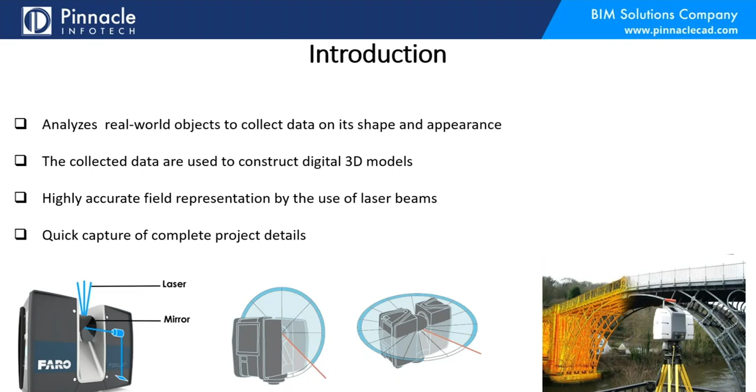As I said before, the important benefit of using laser is to improve quality and accuracy. It takes planning and detailing to a different level on site. We can get immediate feedback, and real-time scans can be done and accessed immediately to improve operations. The scanning process can be done in minutes, whereas conventional methods could take hours to do the same survey.

I would leave the panelists to give more details on this and how they are reducing and eliminating rework. We are reducing the physical effort and streamlining coordination on site. So today our focus will be on construction management and how the laser can be used. Now I will pass on to Leo, who will take us through the great project that he is doing and the wonderful job his team is doing.

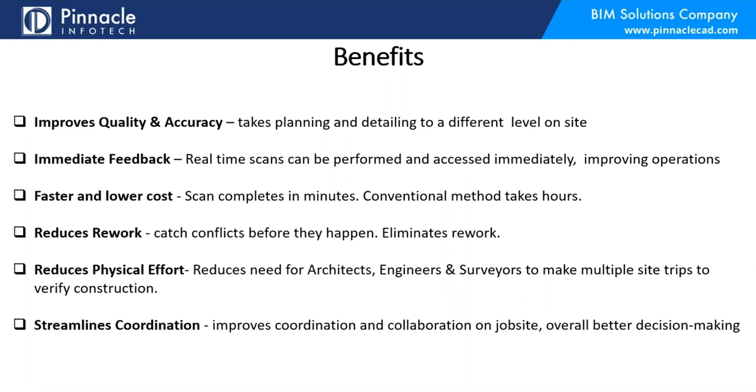If we go into project specifics, our project incorporates in its design a variety of technological innovations with unique features, such as the enormous gross capacity of 92,000 seats. The bowl is an air-conditioned seating arrangement that incorporates air diffusers and under-seat cooling nozzles to pump cool air into the stadium during the tournament phase.

The most unique feature, though, is the construction, erection and installation of the world's largest internal roof structures, which span over more than 350 meters.

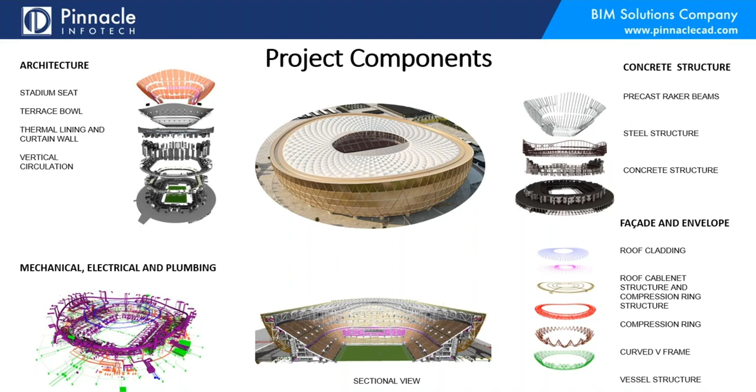The field of laser scanning implementation in our project is focused on as-built data collection, measurements, and digital project controls. We exercise a lot of tasks in terms of earthwork management. We're making advanced implementation deflection and deviation analysis, and we also support construction staged impact analysis.

We work digitally to support inspections, and generally speaking, we have close integration with the construction teams by supporting them with virtual erection and simulation studies.

The consistent collection of as-built data in point clouds allows for a more efficient management of site activities in a way that was not possible before. It drastically eliminates risks and uncertainties, allowing for more prefabrication on site. It also reduces human errors and error-prone observations, giving the opportunity to the end user to process and evaluate an enormous amount of data.

The consistent collection of point clouds allows comparison between two principal stages, the design and as-built models, which can be extracted into drawings. We can obtain archival records of our project at any time interval, and generally speaking, we document critical milestones.

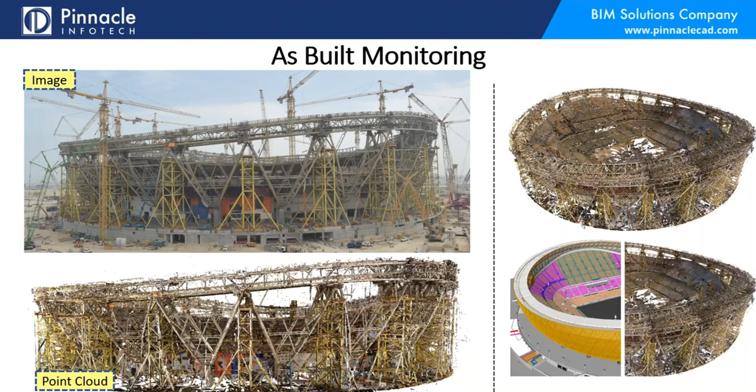Specifically in our project, the use of laser scanning is extremely beneficial and is highly recommended for monitoring and control purposes, which are primarily related to construction performance requirements. This may be applicable for large piers, buttresses, long span beams, and overall complex building components.

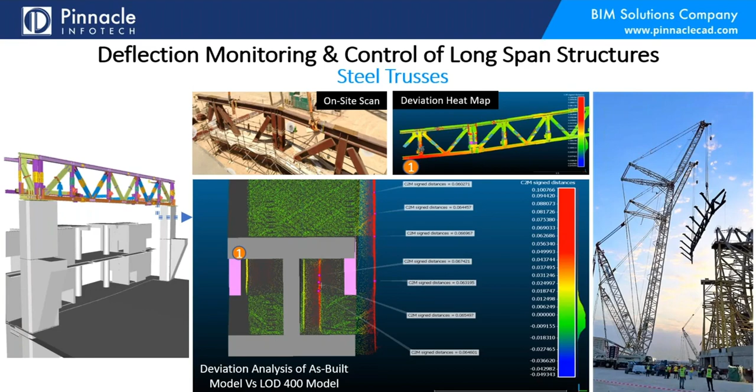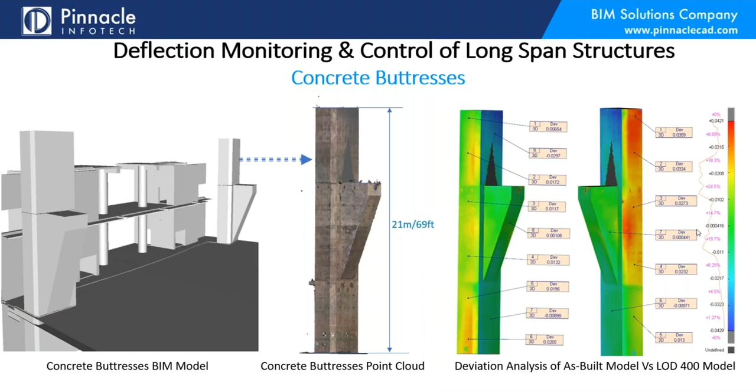The main function is based on the overlay of BIM models that are developed to extract shop drawings. Those models are called construction models, or LOD 400 models, which are overlaid against point clouds. That overlay can be used for multiple purposes, to support multiple scenarios and reports, which we can see in the slides below.

If we start studying cases one by one, some exercises we have already undertaken, in the following slide you can clearly see how the findings of a laser scan analysis were extremely useful for main contractors. You can clearly see an assembly of steel elements that was conducted for the sake of evaluating the erection of a truss beam along with its superstructure.

This was done in terms of construction tolerance and deviation analysis. You can clearly see how the point cloud itself represents all deviations in a heat map, which is used for construction verification purposes.

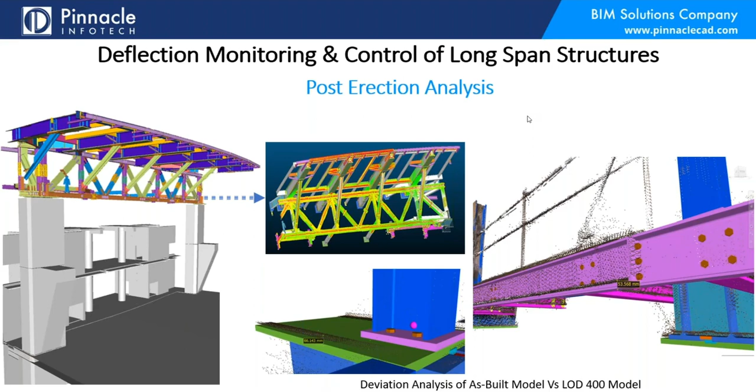Our project considers a modern requirement of sports architecture, which is very strict in maintaining unobstructed views, having very efficient utilization, making clear sight lines for the spectators, and providing ample spaces that usually pushes the design to its limits.

The below extract from BIM clearly shows how a truss beam and a set of cantilever beams support the superstructure of the stadium, which is equivalent to a 5-story steel building, and which also carries the seating bowl.

Leo, we cannot hear you. Can you check that? Leo?

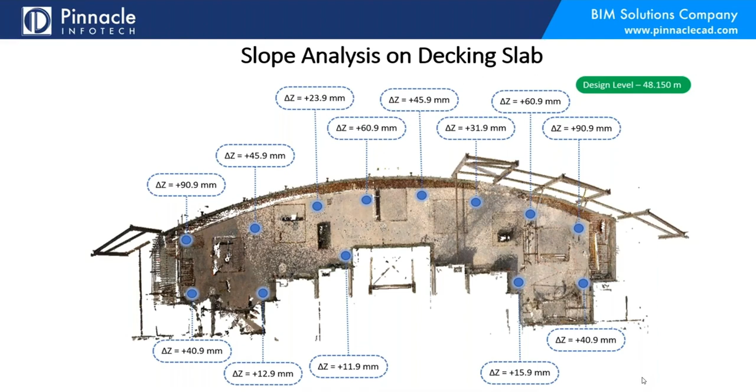Since we are dealing with a special structure that has pushed the design limits of the structure itself too much, the accurate monitoring of as-built conditions was achieved by using laser scanning and evaluated in a BIM-based environment. The current approach enabled the general contractor to have a better understanding of the structure's performance and evaluate thoroughly the risks associated with dependent construction activities.

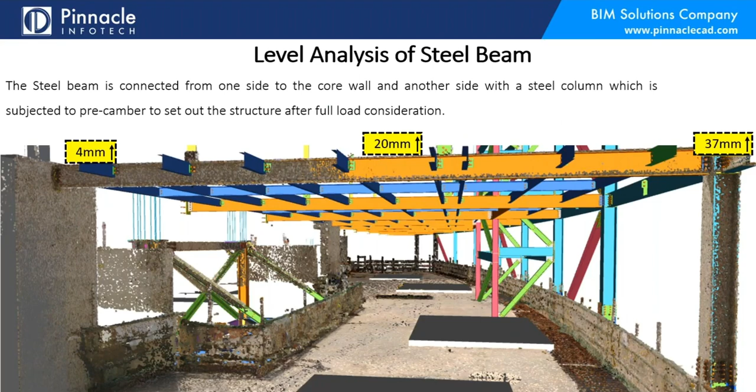In our project, laser scanning is also used as a supplementary material for digital inspection purposes. Although we have allowed for systems like BIM 360 for digital inspection requests, we also support those inspections through the efforts and tasks undertaken by the point cloud itself and through laser scanning.

We can clearly see in this slide how a LOD 400 model of one anchor plate is overlaid against the BIM model, and we created a deviation analysis report, being able to hand over the part of the work from the reinforced concrete subcontractor to steel. Next, please.

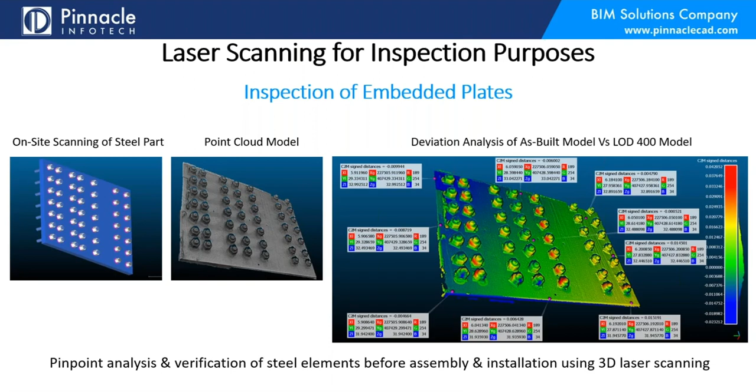Now, of course, laser scanning can be used in simpler tasks that may be of equal importance, related to floor levelness and flatness. In projects like ours, consisting of multiple building units forming a complex, maintaining consistent floor leveling is of paramount importance. The floor levels usually accommodate steel embeds and steel columns, so you have to ensure there is consistent leveling to receive those embeds along with the application of screed and flooring material.

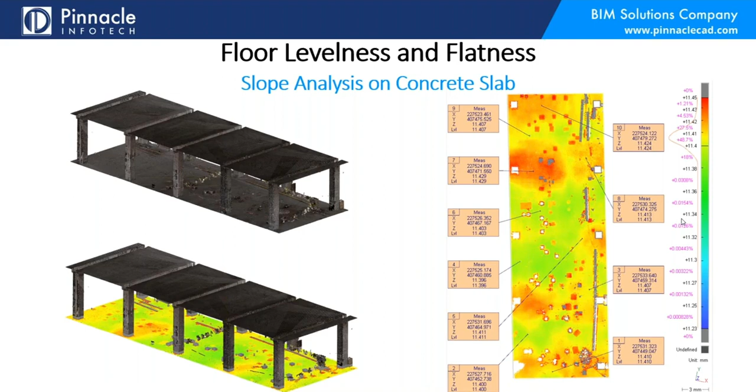Next slide, please. Thank you. Of course, as part of the broader implementation in our project, we use laser scanning on all building components, including the facade.

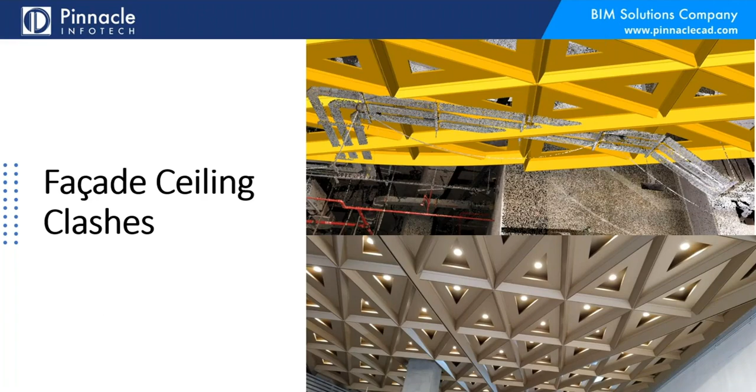In projects like the Lusail Stadium project, which is under a design and build type of contract, the works may be executed concurrently - meaning that although construction or MEP works may proceed on site, some elements may still be under design. We had the opportunity not only to overlay construction models against design models, but also to boost this activity by collecting point cloud data and directly comparing it with elements under design at that stage. This gave us a streamlined process on site with elements in different stages - some released for construction, others still under design.

The facade is a critical component for the aesthetics of the project, which interfaces with the primary steel elements through the brackets. In our project, we had approximately 4,000 brackets, each individually coordinated against other interfaced elements like MEP or other structural works before issuing the brackets for fabrication. This saved a lot of abortive work and delays by having all elements fabricated and installed at one go.

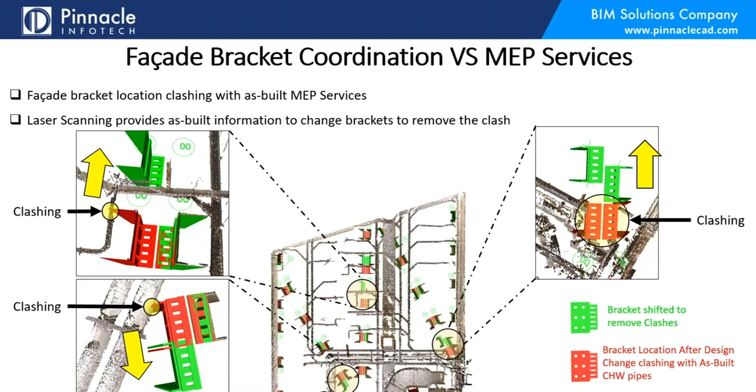Digital handover was also of paramount importance and extremely useful for the bracket and facade installation. Since the point cloud can capture millions of points within a very short period of time, laser scanning was used to hand over the primary steel package from the steel subcontractor to the facade subcontractor, with full monitoring of deviations and evaluation that the handed-over work lays within the acceptable range of tolerances.

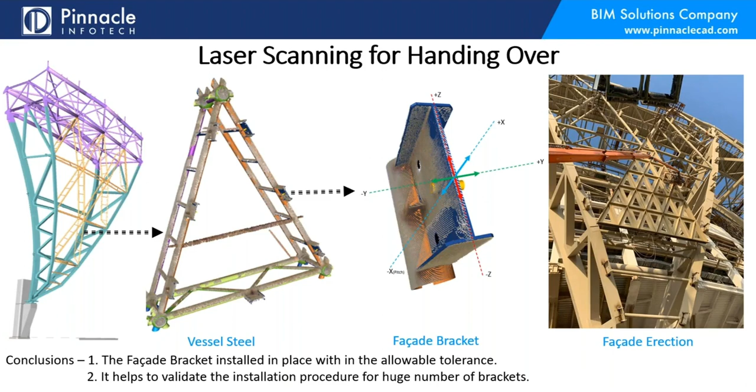Of course, MEP cannot be excluded from the laser scanning strategy, and it is primarily related to verifying the MEP works on site. Complex and heavy-duty MEP arrangements have been scanned and compared against our construction models at different stages. Especially for heavy-duty MEP rooms, laser scanning was used to verify that all assemblies are going as planned, without any actions that may cause delays or fail to conform to the tolerances.

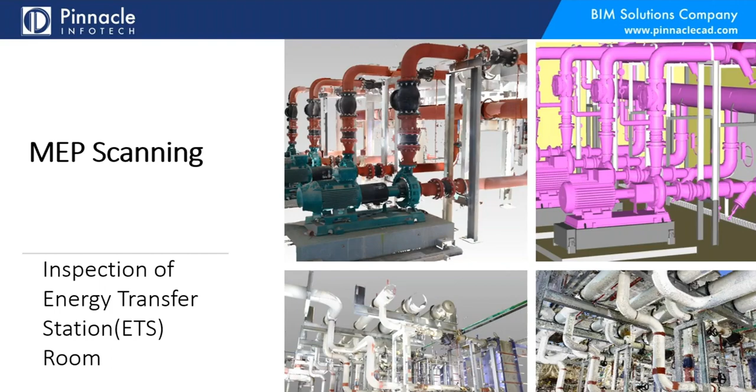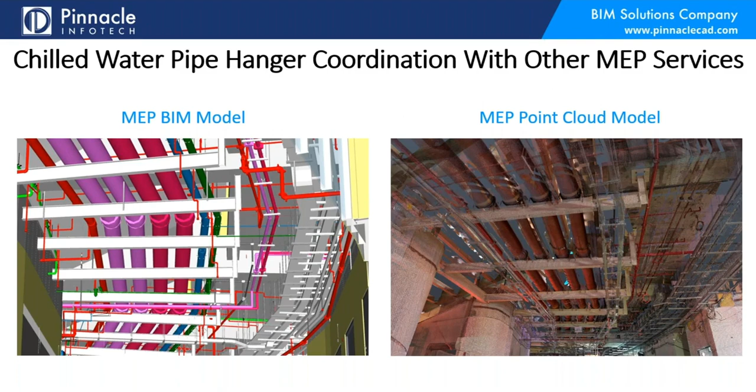The next slide clearly shows an example of good execution on site. As you can see, the construction model used for extracting shop drawings released for construction on site is met at a very good percentage. The point cloud in this case verifies that all inputs put into the construction model are implemented on site without deviation.

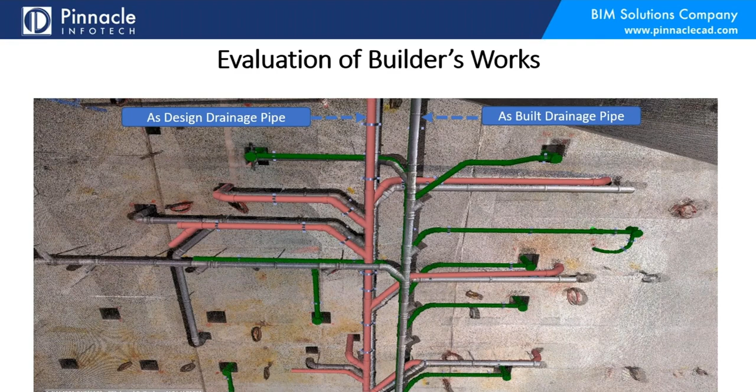Another extremely useful application is builder's works validation. Usually the builder's works are executed prior to commencement of MEP works. This is a representative example of comparing the cutouts of one suspended floor against the drainage system. We had the opportunity not only to verify that our builder works are implemented, but also to implement changes through our change management workflow, using point clouds as the sole source of information for releasing drainage works on site for construction or implementing changes on the systems.

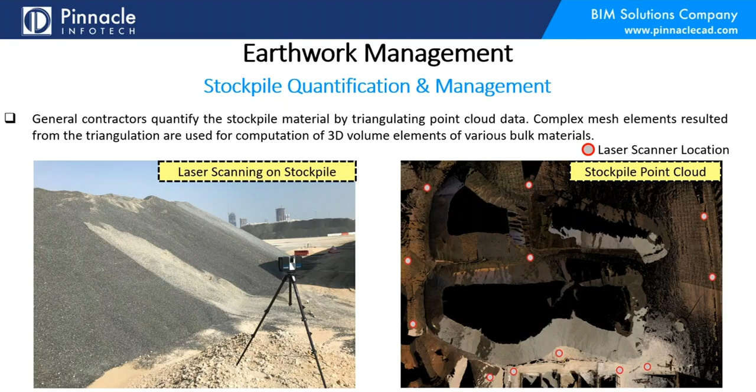Laser scanning was also used in different nature of works, such as earthwork management. In our project, we have a great stockpile area of filling material coming from the site itself, and we also supply aggregates to our batching plant. The close monitoring of aggregate quantity was of major importance since currently, due to COVID and other parameters, there is a shortage of materials on site in the market. Laser scanning provides us the opportunity to rationalize volume calculations by implementing a very accurate input, which enhanced our output, the volume calculation.

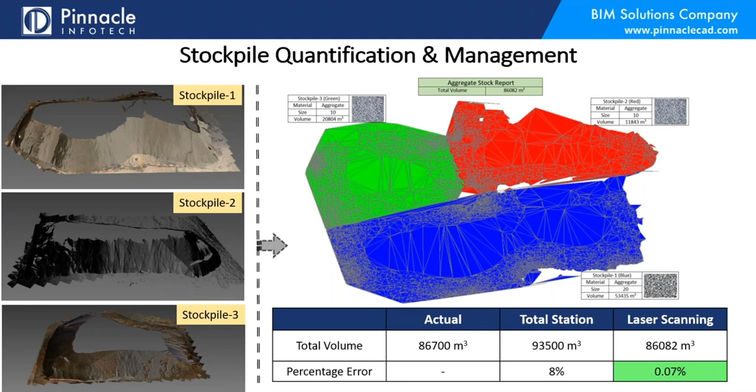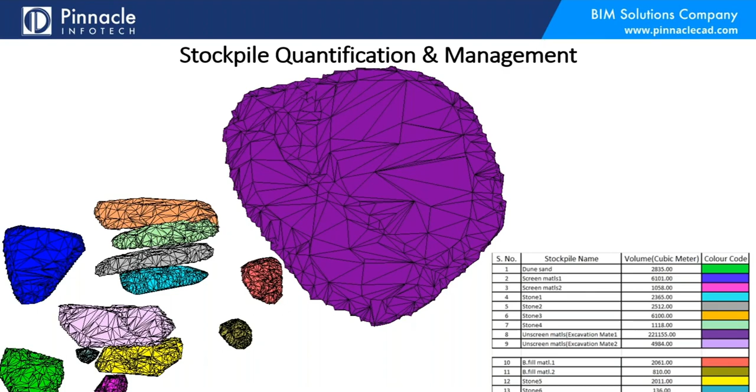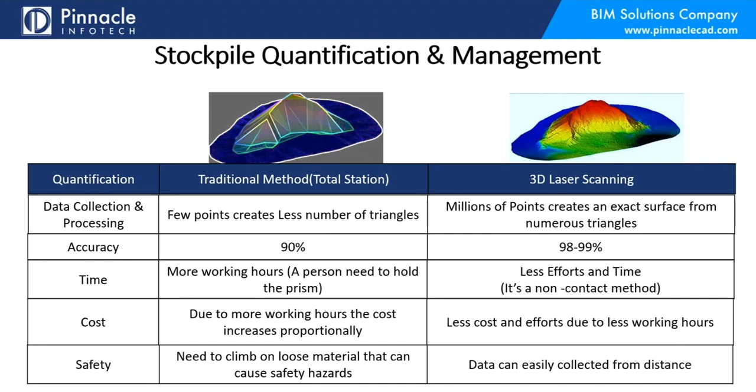In gross percentage, each stockpile evaluated by the traditional method against the laser scanning always shows approximately a variation in quantity of 10%. In other words, the laser scanning input can optimize the volume calculation by approximately 10% and give us more accurate results compared to the deposits we have in terms of stockpile and aggregate materials.

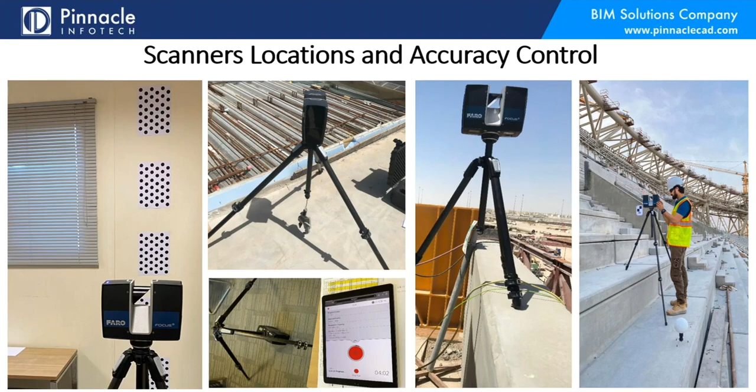Without any doubt, the instruments we use for making all these studies are our laser scanners. There is a special process for the laser scanners to always be calibrated and up to date. Fortunately, today's technology provides us with a lot of tools for self-calibration quite frequently, which ensures that whenever we want to achieve higher quality, higher accuracy measurements, self-calibration is always a tool that modern technology incorporates, extremely useful for our own performance.

Now the next part of our presentation is slightly different compared to the previous one. We will be presenting how laser scanning is implemented in an end-to-end solution to support a very specific requirement for the roof, primary steel and facade structures. The main requirement we had to respect in this workflow was the sensitivity of these structures to deformations, meaning we have to deal with highly deformable elements where, for each stage, the deformation should be controlled and federated within an agreed framework of tolerance.

The main aim was to establish a workflow that could ensure proper handover between different stages for different parties. For that purpose, Pinnacle created a composite BIM and laser scanning roadmap comprising 6 control stages. Those stages are considered the pillars of a successful project delivery for that part of the work.

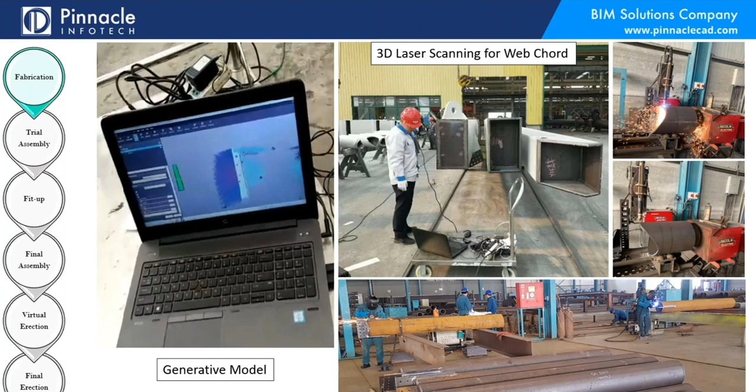Afterwards, the vast majority of steel elements, consisting of built-up sections, were categorized into certain assemblies that had to receive a trial assembly. This trial assembly was a requirement of the general contractor to the fabricator, to ensure that prior to shipping, the steel elements would be of the proper geometry, not in the form of parts, but in the form of full assembly.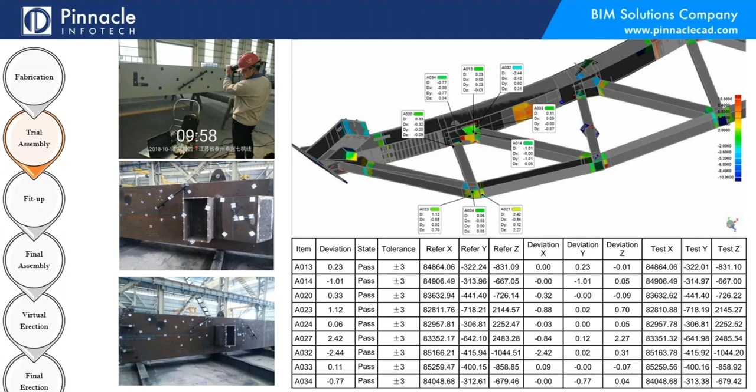So several trial assemblies took place. They have been scanned and evaluated in a deviation analysis report, so even the fabricator was aware, before shipping the order, of the range of tolerance being shipped to the site. This also assured the general contractor that it receives material with the cut length and shape as per the design requirements. Now, upon delivery of all these built-up sections, received by containers and shipped into the project location, the fit-up works commenced.

The fit-up works implemented a temporary arrangement of welding. It's worth noting that our package is primarily related to welding connections, so we apply temporary welding for all these steel assemblies, and we laser scan it for the sake of evaluating its accuracy.

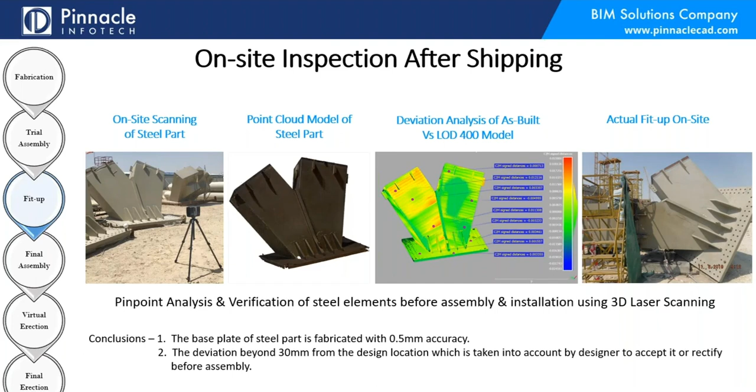Once the temporary fit-up works were confirmed to meet the proper alignment of the members, we proceeded with the full welding on site.

In your pictures, you can see a V-frame. It's worth noting that the size is extraordinary for those segments. We're talking about sizes that may exceed 164 feet in length, and each sectional profile may have a size of 6 feet by 4 feet.

The critical and key challenge we had to meet in this process was that during the full welding process, the internal stresses that the welding exerts into the section create excessive expansion and contraction into the members, which in certain cases creates a local distortion.

So the aim of the laser scanning at this stage was to evaluate the magnitude of the welding effect over the final assembly on ground, including the temperature effect from rising from daytime to the night cycle, which, considering the size of these elements, is also quite considerable.

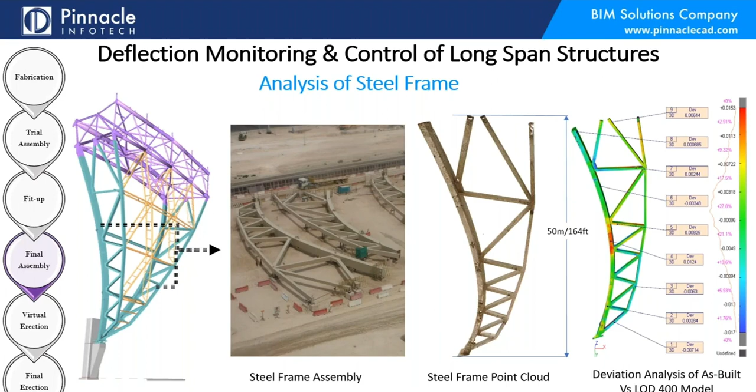Of course, the point cloud itself, upon the full welding process, becomes the most accurate and sole source of as-built information.

So virtual erection and simulation studies were performed based on the point cloud collected from the final welding process, and they were used for verification purposes in terms of lifting, interfacing with other as-built elements, and also deviation analysis against design models in order to evaluate the magnitude of change during this fabrication and fit-up process.

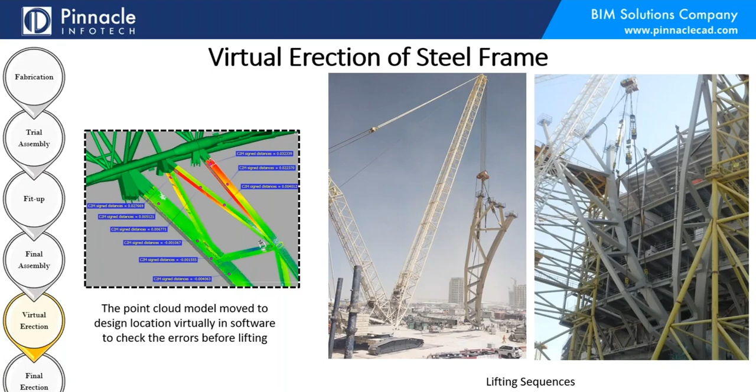The virtual simulations were performed for each component and stage of the primary steel package. However, the giant dimensions of the members, which in certain cases may exceed weights of approximately or more than 400 US tons and span over 110 feet, made this a very challenging exercise that the laser scanning performed exceptionally well.

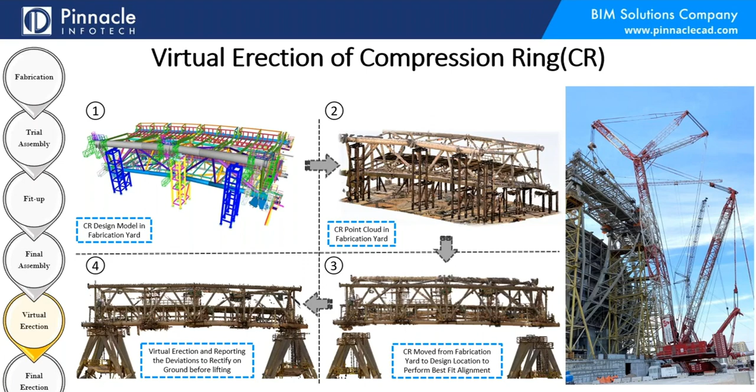The interfaces between adjoining members were collected and controlled based solely on laser scanning, and we achieved great accuracies. Specifically, the scans associated with these measurements didn't exceed the range of plus minus 1 millimeter, and we are extremely proud of getting so deep into this accuracy exercise and providing such trustworthy results to the project for undertaking this kind of complex work.

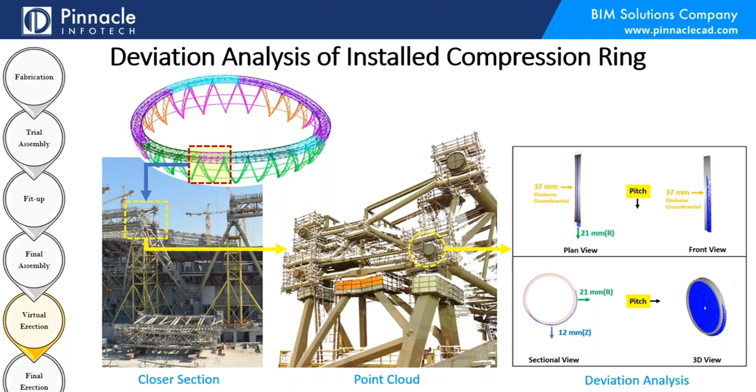Lifting simulation is also of paramount importance given such a size and self-weight of members.

So the lifting itself was virtually processed in BIM by using the point cloud geometry, and we created sequential steps that were part of the official lifting report that we submitted to the client for approval.

So even the lifting engineers and the people engaged in designing such a complex lift took advantage of having a point cloud in place, having a virtual simulation that revealed all the as-built conditions, not only for the member currently under the lifting process, but also for the difficulties they had to face on the landing of those elements.

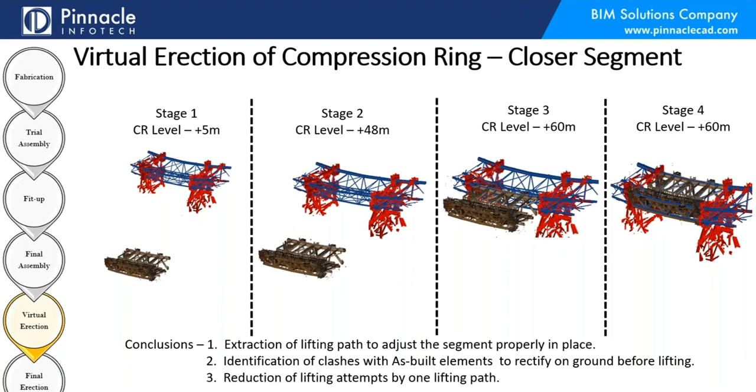Now, upon completion of the works and achieving the final erection of each member, there is also another set of scans that creates the final state of the erection process, which we can consider the fixed and final position of the member, evaluated again using such a rich amount of as-built data.

We can produce reports in a fashion that serves every need, and it might be understandable by anyone, no matter if he's been a user or not.

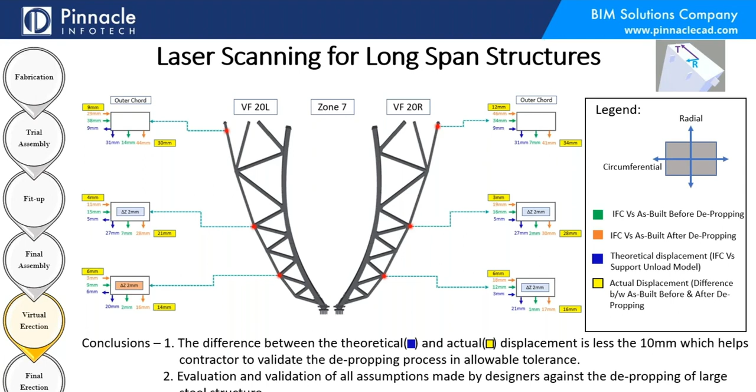Now, all the above mentioned is summarized in a one minute video, which was produced by the general contractor for the specific case we described. You can view it for your reference.

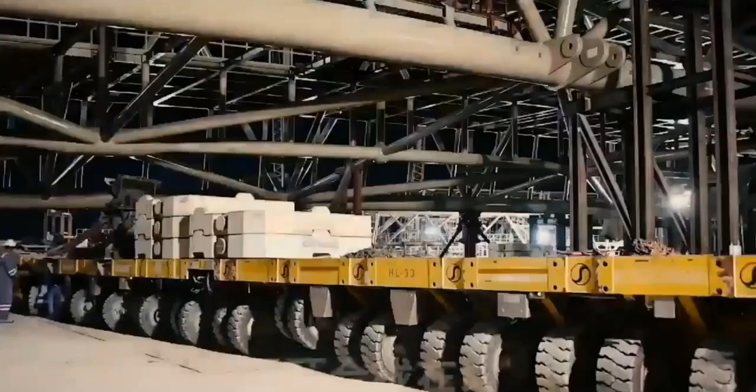It seems that the sound is not available, but in this process you can see how a compression ring segment is transported by the SPMT units and is currently under the lifting stage by a high-capacity crawler crane, which may exceed 1,200 tons at one go, as you can see.

And this is the closing segment which is put into place, as you can see, with great accuracy.

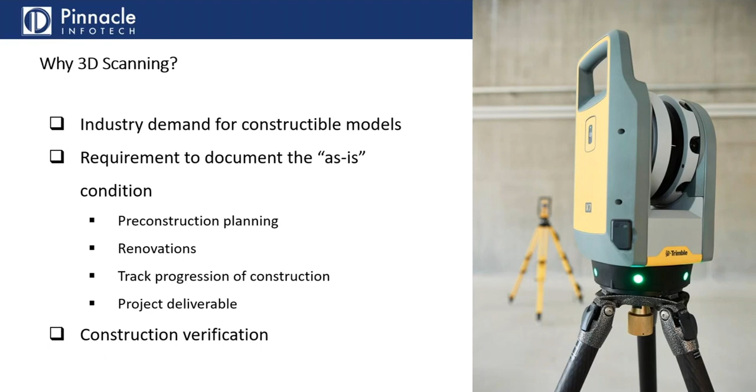So I want to just go through a few examples of some of the ways that scan data is being used on projects, and you may be familiar with these and some you may not be. The first example that you see on the screen is probably the most common use of scan data within the industry, and that's just to use it to create very accurate as-built models of job sites.

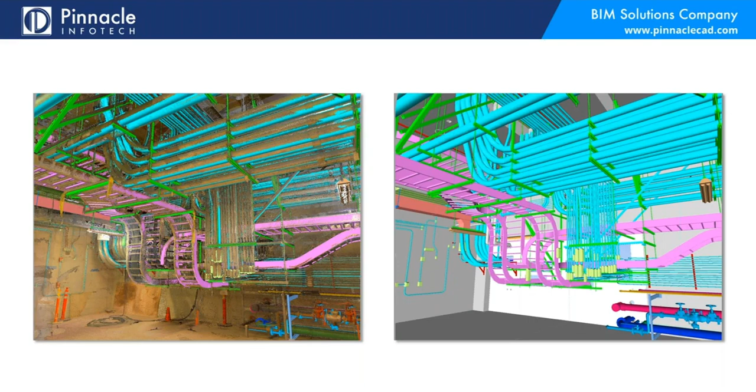And then, from that scan data, they started to extract the model information. On the right-hand side, you see an image with the scan data turned off, to see how much information they were able to extract from the scan data to produce that very accurate LOD 400 model that showed what was installed on the project site. They turned that over to the owner at the end of the project as a deliverable to them. So this is one of the most common uses of scan data on the project.

But just like what Leo was showing with the steel fabrication, a new way scan data is being used is that, if you look at the 3D laser scan, that really becomes your constructible model.

It is a model because it's a 3D representation of the environment. And so you're starting to see hybrid models of both scan and model data being used for prefabrication of any kind of prefabricated units.

In this example, from a mechanical contractor working on a boiler room, they were going to install a new pump assembly on an existing system but didn't have any drawings to work from. So they scanned the boiler room where this new assembly would be installed, then brought it back into their detailing software. They took both the point cloud and modeled only the connection points for their flange connections, and that became their working drawings to create the prefabricated assembly.

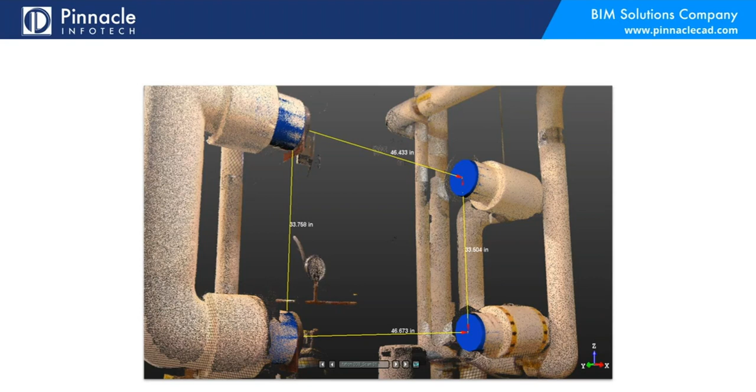As they worked with that information, they were able to bring in the new prefabricated assembly to ensure the accuracy of the construction and the connection points, so that when the assembly left the shop and went to the job site for installation, it would line up exactly where needed without causing errors or delays. You saw similar examples with what Leo was presenting on steel fabrication—the same workflows are being implemented on mechanical and electrical work as well.

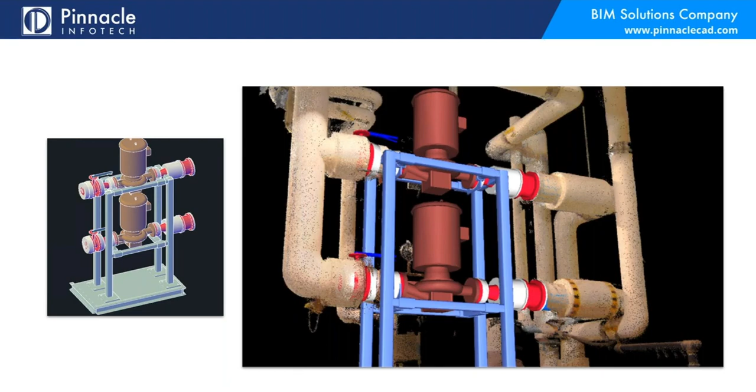Another use of scan data from a general construction standpoint is documenting where rebar is placed before concrete pours. Because scanning technology is so fast at capturing data, and now with scanning solutions doing registration out in the field as you collect it, contractors are implementing it to document job site conditions as they go.

A very common use is around concrete work, where contractors go out ahead of the pour and run their laser scanners across the deck to scan where rebar is placed, or in this example, a post-tensioned cable deck. They document where all those post-tension cables, shown in red, are placed on the deck, because once those get put under tension after the concrete is poured, you're very limited in where you can make penetrations in the slab—you don't want to hit one of those cables and release the tension supporting the deck.

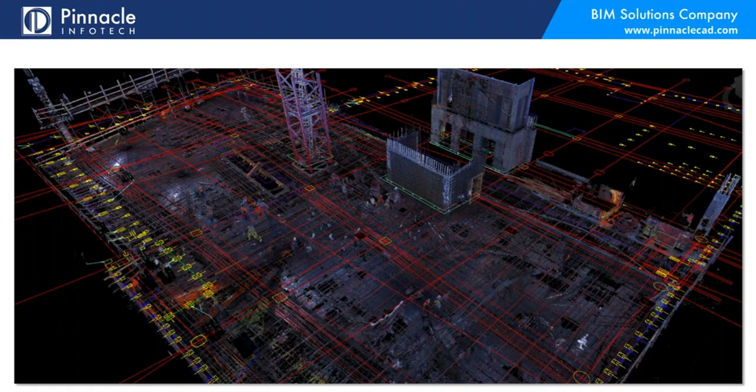For this particular contractor, their workflow was: just before concrete was poured, they would run out to the job site with their laser scanners and capture a pre-pour scan, then drop that information into their 3D model—that's what you see on screen, the model overlaid with the pre-pour scan. After the concrete was poured, they would come back and take another scan of the post-pour conditions, also overlaying that into the model.

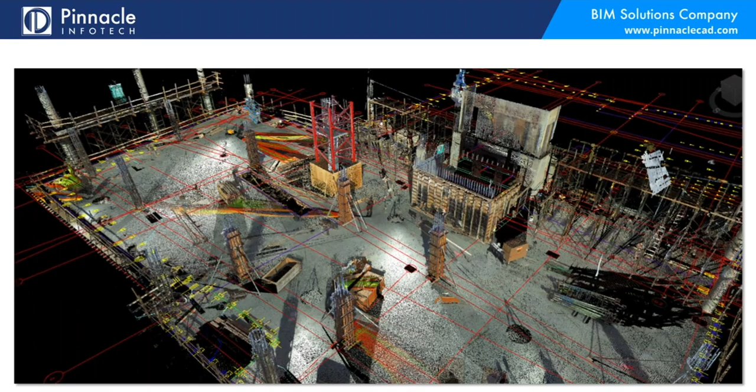The benefit is that now, if they had to make any design changes, they had a very accurate representation in the model of the real world conditions. So for changes like sleeve locations or other penetrations in the deck, they didn't have to stop construction. They could go back to the model, find a safe location for the change, make the adjustment, take the coordinate locations of the new penetration points, load them into a robotic total station, and that station would point out the accurate location to safely drill through the deck. This becomes a great workflow for documenting conditions while still addressing changes without delaying the construction schedule.

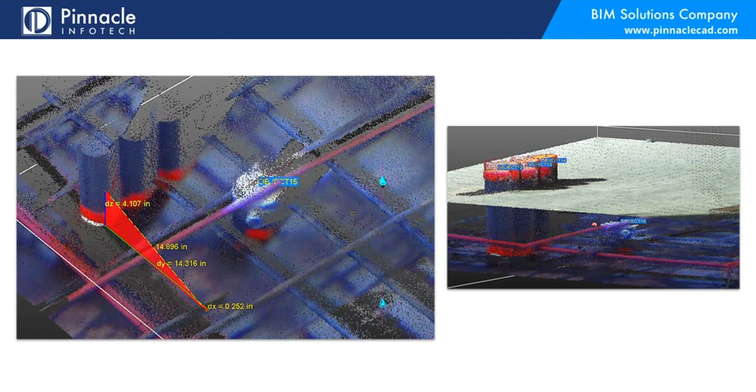Now with the ability to do these types of analysis out in the field, where the scan data is being registered as you capture it, more and more analysis is being done using scan data. A great example is floor flatness analysis, where you take the scan data, run an analysis, and identify, especially in existing construction, where the highs and lows are on the deck you're working on.

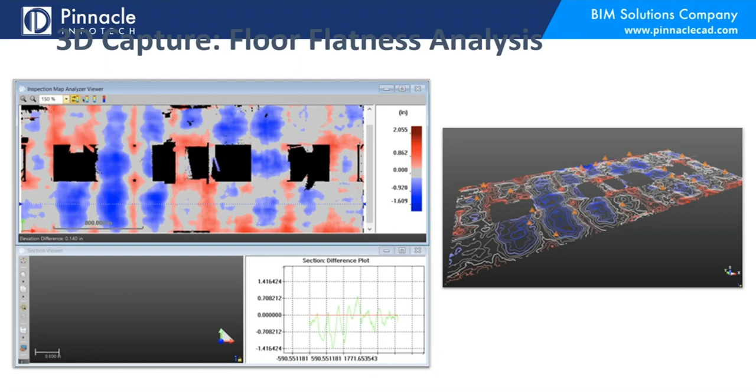In new construction, when concrete gets poured, you have a very short window to continue working the concrete where you have highs and lows within the slab. So the ability to take that scan data and run this analysis gets you a heat map and a contour model showing the highs and lows.

That information can then be loaded into tablet controllers being used out in the field to capture scan data and also to lay out information. You can overlay all those pieces of data to give teams more information about addressing highs and lows or any issues on the job site. You're starting to see this type of use of scan data implemented with the overall construction layout process as well.

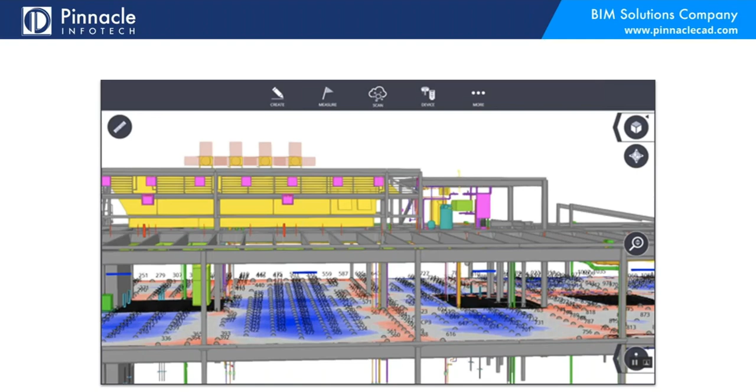That helps educate the teams in the field so they don't delay the projects, but are able to make informed decisions around where they need to make changes or do any kind of layout work.

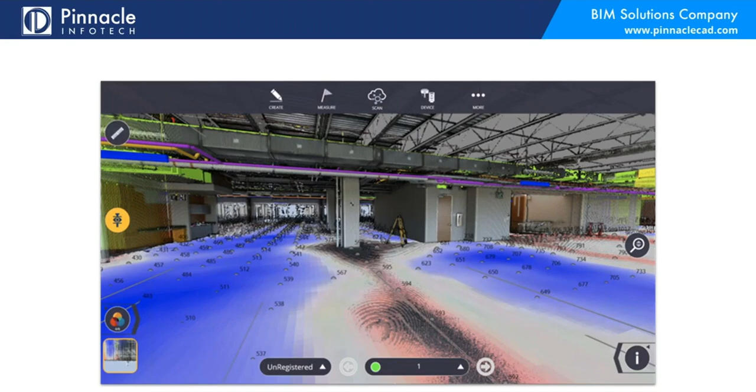The last area I want to touch on before we open up for questions is where things are going with this technology. It's really starting to look at the use of autonomous robots.

There's real interest in taking this technology to capture the progression of construction over a consistent time frame. Because accessing the data is becoming easier, projects are starting to make this part of the typical workflow, where the scan is treated as a model.

The ability to have a robot go out and capture things on a more frequent, regular basis helps inform decisions as issues come up, or in doing quality control checks to see that things are actually being installed as coordinated. You're starting to see a lot of work in this area, with autonomous robots taking advantage of the technology and deliverables from the scanning process.

There are lots of different trends starting to happen, but the overall theme around scanning in general is that it gives very useful, highly accurate information of project conditions in a short period of time, becoming that kind of 3D deliverable that represents as-is conditions. So with that, I'll hand things back over to Bimal, and we can open it up for questions.